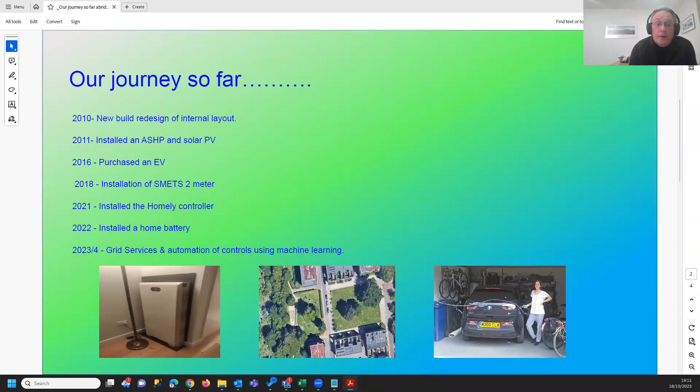And then in 2022, again, there's a link in the chat, a blog link that Nicola and Transition Energy kindly produced, records the thinking around the home battery and the benefits that home battery provides to us as a homeowner, and frankly, to the grid in terms of helping the grid in my little small way of grid balancing. And then there's some notes here of what I think's ahead, and we can perhaps talk about that on the final slide. Next slide, please.

I've called this a grand thing called an energy statement, but I thought it would be helpful just to give you a sense of what's been achieved through this journey and the current annual performance. So our building's a stacked building over 3 floors. You can see it on the left there. It's just under 265 square meters. It has a flat roof with a small parapet wall, and sitting on the roof are the panels and the external heat pump in the southwest corner.

It's in the southwest corner to minimize shading and frankly, minimizing the disruption to the pipework that comes into the house. And we have a home battery on the ground floor, where we have our internal living space, both on the ground and the middle floor of the building.

Prior to the changes that were thankfully put through the developer during the build, the EPC on the standard build was an EPC B with estimated gas usage of 24,000 kilowatt hours and electricity of around 6,000. It's a large building, but the percentages are typical to many homes in the UK today, with gas representing the highest percentage of the total energy.

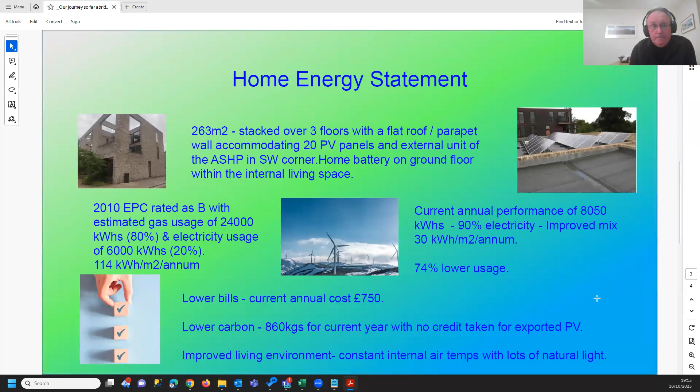So my observations, I call them observations rather than learnings, I think. My observations are, if it's possible, when you're thinking about a retrofit, see what you can do to change the layout to accommodate light, air, and solar gain. Recognizing one might have to be concerned about summer periods, but if it's possible in the retrofit planning, think about your layout. Clearly, the subsequent work on the fabric of the building, then once one's got an idea of energy demand, think about the transfer across, if possible, to an all-electric solution for heating.

My observations, and I say this from a perspective of in 2010, it was rather an uninformed decision. It was more a decision I wished to just do it, I had very little data about the performance of the building. Now, with the use of the smart meter, also increasingly people are offering opportunities for people to become part of tests and research for data capture in their homes to look at the thermal performance of their buildings.

I think the environment today provides people who are interested with the opportunity to capture much more data, and through that become more confident in decisions they're making at the time, and also allowing them to, what I call, perform post-install evaluations.

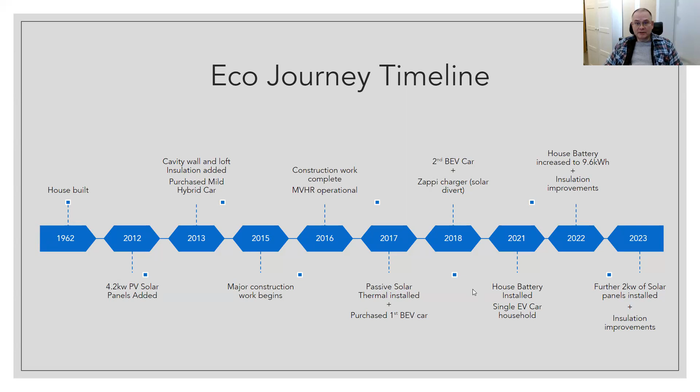So that is possible. You can do it by yourself. So solar is by far the simplest and immediate direct reduction to bills. It was a no-brainer for us. It was very little effort. Went in, our bills dropped by a third. I would recommend that to everybody if you can do it.

The solar thermal, which you can see just here, is another boon and great if you're going to have an air source heat pump, because it reduces the demand on the air source heat pump, or the high temperature demand particularly. And so they have a lot smaller unit being installed in our house probably next year.

MVHR, can't sing its praises high enough. That has been the biggest improvement to our life. Yes, it does save some money, but it stops mold, it stops dust running around the house, smells disappear, the list goes on. And the lack of condensation, which you can seal all the windows so there's no drafts, and we even dry our clothes indoors.

But the reason we did it was not for environmental reasons, it was actually just to get rid of the allergens, because my wife and my daughter have serious allergies to various things. But yeah, I would never ever buy a house without one nowadays.

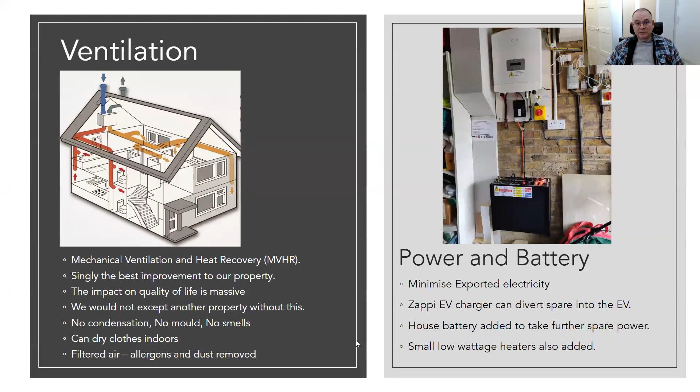Have I jumped too many?

No, that's right. Insulation wise, like I say, we did some extensions and some major building works. During that building works, we used Thermalite bricks with Celotex in the cavity. That made a world of difference. Can't sing that one's praises high enough. It's better than cavity wall insulation by a long way. We've still got some bits that are cavity wall insulated.

In the loft, we decided to go easy, and we left the glass fibre between the joists because it's just a pain to try and cut everything to size. And then we overboarded with Kingspan. So there's 100 mil of Kingspan, and this is the loft hatch, which is a full depth one, and you can see the Kingspan's way beyond that. And then just have a floating board on top.

That produces well over the insulation they recommend, and amazingly it holds quite well, and you can walk on that. And in there you can see the MVHR unit and the collectors. So you have one for in, one for out, and they run to every room. I then insulated the entire thing at the top rafters as well, so it's a semi-warm loft. So I've insulated the bottom and the top.

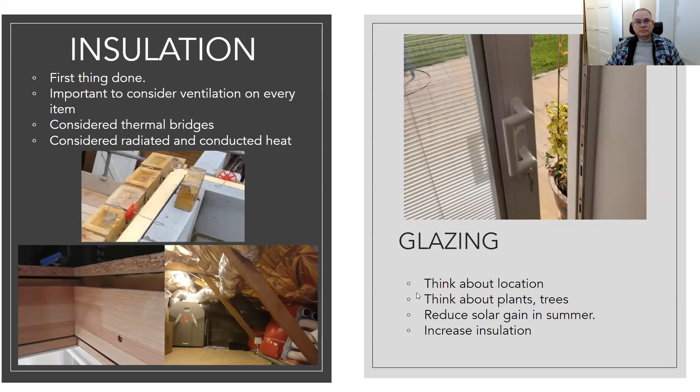But I would recommend plants and trees. They affect things far more than any hard landscaping you can do, as you'll probably hear later on. But my first point of call is always insulate first.

How do we now compare? So a little graph I did showing you what the electric is. So everything in green is PV related. Everything blue is overnight rate, as in cheap rate electric, and then normal grid is this orangey colour.

Our PV doesn't generate enough for us to go completely solar, even with the battery. It's better now. I've increased the PV on the house, but it still shows you that it's a tiny portion of mains grid at the peak rate that we pay.

Where we were when we first moved in, we were low E, and it was bad. It was a very cold house, and then gradually over the years, you can see with all those measures, I've moved from one to the next, and we're currently on around 55 kilowatt hours per square meter, which brings us down to there. So we're bang on. And as Ian said, the average in the UK of a brand new build is 120, so it's quite poor. It's a B average.

Generally, the house is now a lot more comfortable to live in. It's less cleaning, which means we've switched our cleaning fluids to white vinegar and the various things they recommend. My wife would know more about that, so we don't use any harsh cleaning products. They're all natural now. But it does help not having mold and various other things that you have to battle with. It is amazing having an MVHR with lack of mold. Our bathrooms were built nearly 7 years ago now, and we haven't got any mold on them still. So 7 years, nothing. It is incredible.

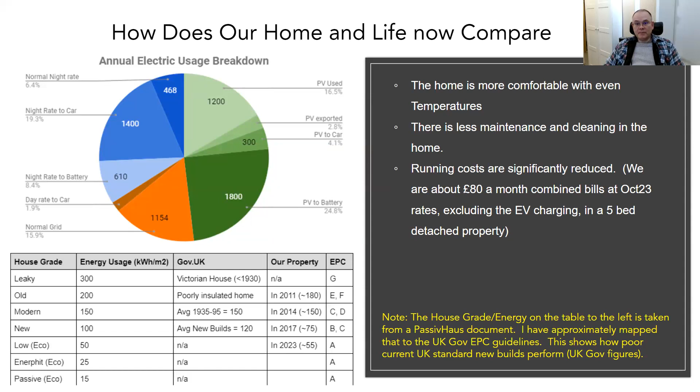Right, that is it. But going forward, I never stop. So MVHR, yes, we've done that, but I found some issues with that when you go to extreme temperatures either side, and so you can have a pre-cool and preheating system, which will reduce your energy usage even more. We're growing some trees to try and shade the house a little bit more. We're engaging with a couple of people. I've got an engineer coming around tomorrow about the air source heat pump, and they're very excited because we've got so much already going on.

There's a few insulations, so thermal cameras. Yeah, rent out one of our thermal cameras from Carbon Footprint. I've got my own camera. In fact, my phone has a thermal imaging camera built in. I go around every year, every winter, to see whether I can improve anything. So I will be improving the insulation yet again in thermal bridges I've found.

But then in summer, we're looking at house cooling, because the tail end of it, we've discovered, is you insulate it, you close it all down, and if you get 40 odd degrees, it's very hard to cool the house down again. And so yeah, we've learned our lesson on that, and so we need to work with that. That sums up everything, and I shall pass back to Chris.

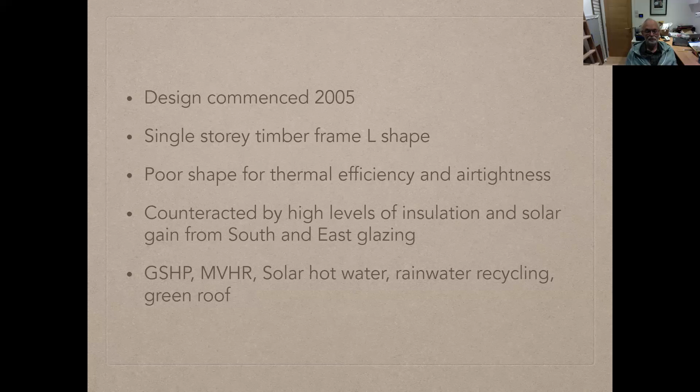So I should say we don't live there anymore, we've moved. But for 13 years, everything worked, which is always nice to know, isn't it? So the original systems are all in place. That's to say, the ground source heat pump, the MVHR system, the solar hot water system, and the rainwater recycling system. I've done no maintenance at all on the ground source heat pump or the MVHR, apart from changing filters.

On the rainwater recycling, because you're collecting water off of a flat roof, a lot of other stuff lands up on the roof as well. And so occasionally I would clean out the bottom of the rainwater tank, just simply by dropping a pump down and dumping it. And the overall energy use has turned out to be quite close to passive house levels, even though it's not a passive house design. And that's really, I think, because of the fantastic benefit of solar. You can really collect a lot of heat from the sun, even on cloudy days, if you've got a lot of glazing facing it.

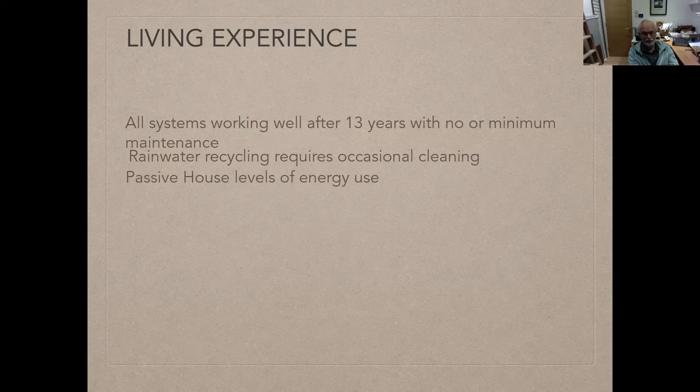So moving on to the last slide. What are the problems with that? Of course, the problem with collecting heat from the sun is you get it when you don't want it in the summer. Now, the advantage of our house was that the south-facing windows face a liquidambar tree, a large tree, probably 30 meters tall, and a lot of the summer sun is kept out of the kitchen area by that tree. And of course, conveniently, being a deciduous tree, it obliges you by letting the winter sun straight into the property in the December to March, April months.

If I was still living there, I would definitely be incorporating solar electricity and battery storage. I think that's a no-brainer. We decided not to do it originally. There was some solar shading, it was complicated, and we had enough on our plates, really. But I think, as has been said, the opportunities of tariffs that vary with time of use and so on are such that solar panels and battery storage are a really good idea.